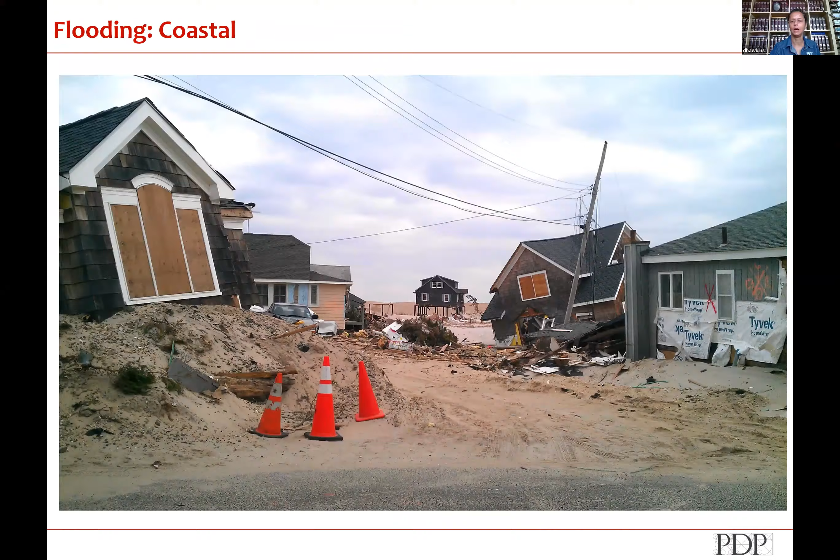Historic communities are always flooding. This is nuisance flooding, this is the roadway that causes you to go around. Doing this quickly—this is what wind and waves look like, and this is the aftermath of wind, waves, and water. Ice on a river, and we were here.

So this is the Schuylkill River in Philadelphia. I just did a flood guide for Manayunk in Philadelphia. This is what it looked like on the other side of the buildings—the water rose from the river and was percolating up on the street.

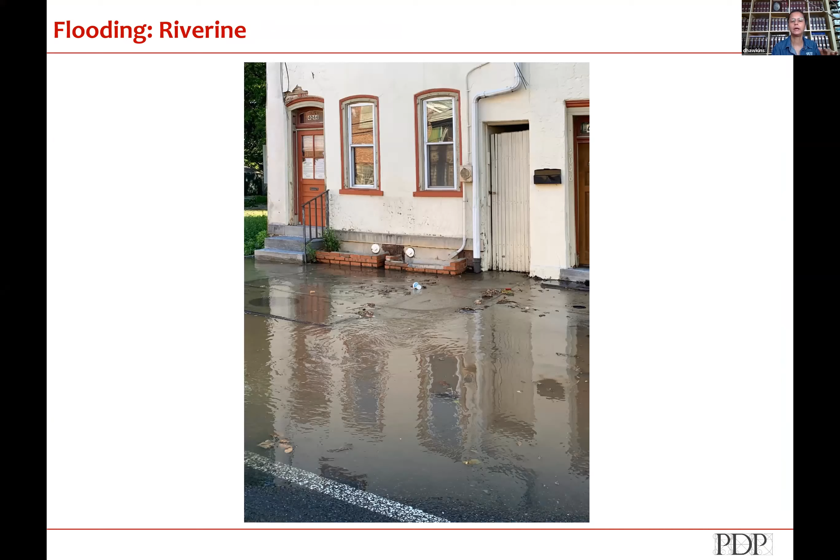You can also get flooding off of lakes. A lot of flooding is due to storms coming in and the impact of that storm—wind, water, wave combination, rain coming down. It could also, in the case of a river, be raining upstream and come down and affect a neighborhood below. All of those things can cause flood. The other thing I won't spend a lot of time on is infrastructure failure—a water main break, for example, in a neighborhood could also cause a flood.

The National Flood Insurance Program was founded in 1968. Most people are unaware that their homeowner's policy does not cover flooding—no standard homeowner's policy covers flooding. That means if you do not have flood insurance, the full risk of the flood is on you. Any repairs or losses you have are on you to repair, financially. The federal government does not magically come in and throw money at a flood.

The National Flood Insurance Program was founded in '68 because a lot of property owners had no flood insurance, and they were realizing flooding was becoming an increasing problem. Flood insurance is available to any community that meets the floodplain management regulations of the National Flood Insurance Program. I haven't checked for Delaware whether all communities meet that requirement, but most typically do. You can get flood insurance—standard policies are $250,000 for the property, including the building, and $100,000 for the contents.

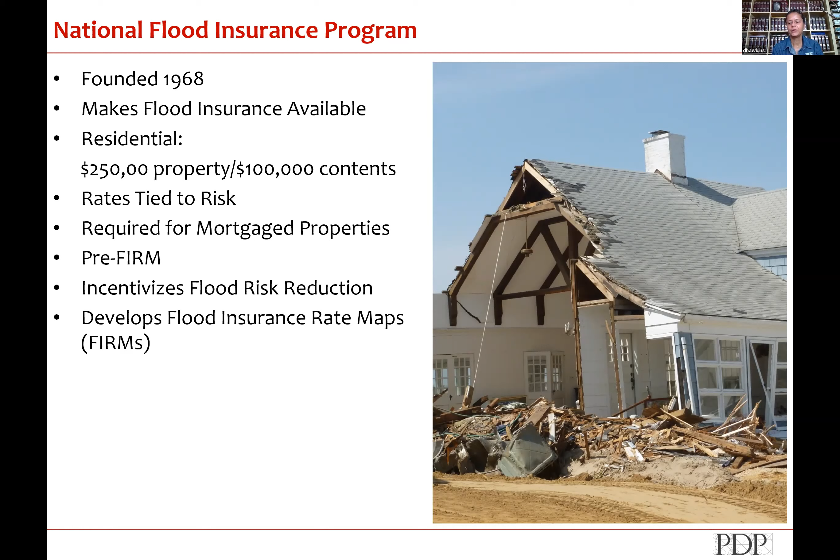One of the other things the National Flood Insurance Program does is develop these flood insurance rate maps. These things look really cryptic. It took me a long time to figure them out, but I'll give you the quick brief as to what you need to look for. This is a flood insurance rate map for Lewes, Delaware.

Everywhere shown in blue has a chance of flooding - it's the entire town. This area shown in blue is known as the Special Flood Hazard Area, which means that in any given year it has a 1% chance of flooding.

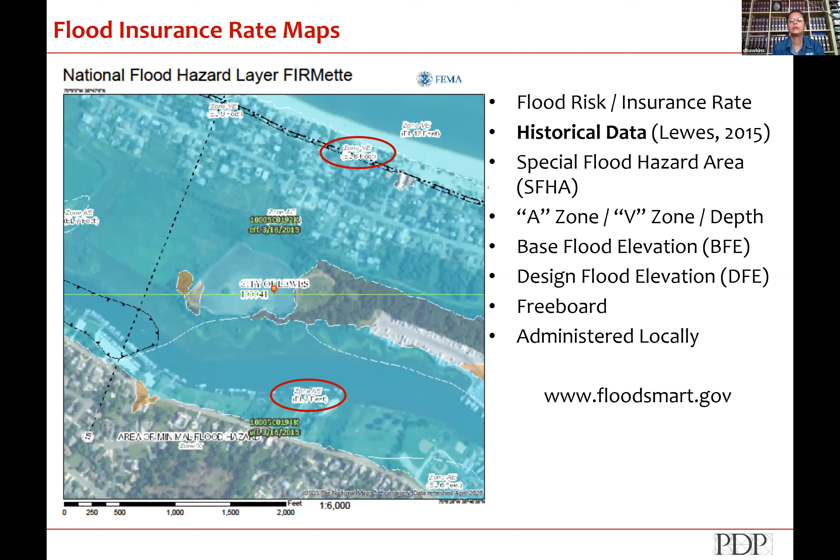If you look at the red circles, the top one is located near the beach, and there's another further inland. The top one says Zone VE. The V indicates velocity - velocity is waves, so there's special consideration if you're located in a flooding area where there are waves. The lower one says Zone AE. A means no waves, it's just rising water. Think about a bathtub rising versus sitting on a beach.

The top one also says 8 feet. What the 8 feet denotes is that it is 8 feet below the base flood elevation. Base flood elevation is the height at which, during the 1% flood, your house will not flood. So the ground near the top beach location is 8 feet below where it will not flood, where the chance of flooding is 1% or less. The bottom one says 7 feet - that one is 7 feet below where the chance of flooding is 1% or less.

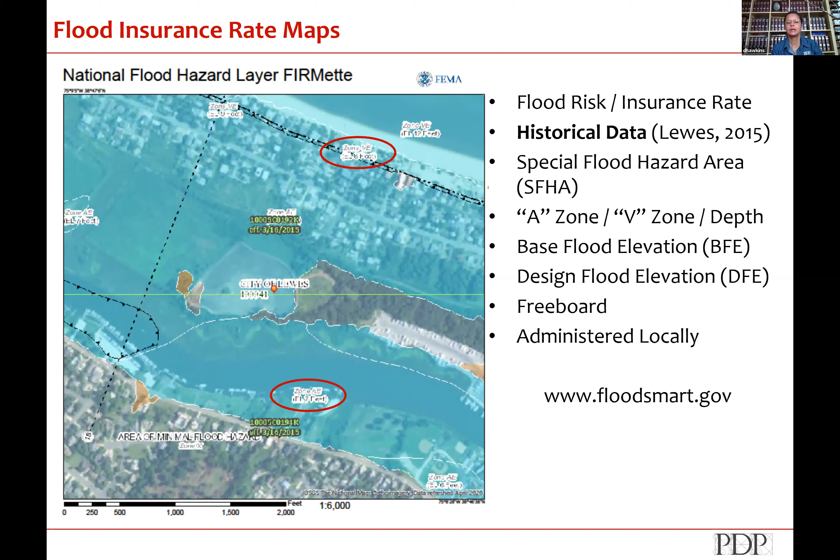That is referred to as the design flood elevation. So if you're building a house today, instead of building it at the base flood elevation, the municipality may say you have to build it 1 to 2 feet above it to meet the design flood elevation. I said specifically the municipality, because every municipality administers their own floodplain management system. No person from the state or federal government is going to tell you how to build - it's managed by the local municipality. They may be informed by the state, who is then informed by the federal government, but the federal government does not tell you how high to build your house.

One of the things that is also apparent is that all of those maps are based upon historical data associated with flooding. So it looks back over the previous years and says, okay, in this location it has flooded at these times. If it has flooded 10 times in this location in the last 100 years, and the flood levels are this high, then that's how they calculate the flood risk. It is not taking into account either sea level rise or subsidence. It's based upon historical data.

I would also like to note the flooding is not all at the coast. There's a lot of flooding in the middle. Rivers are a huge source of flooding. We coast people tend to think about the coast, but the center of the country is also vulnerable to flooding.

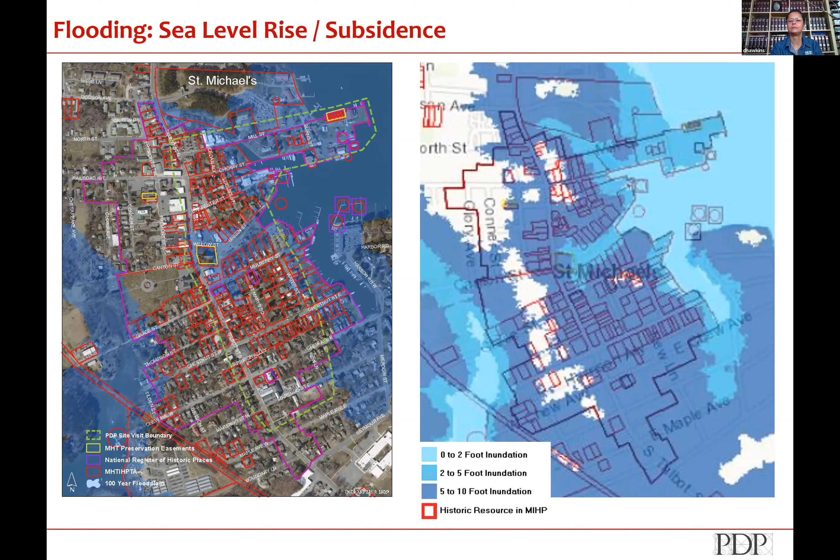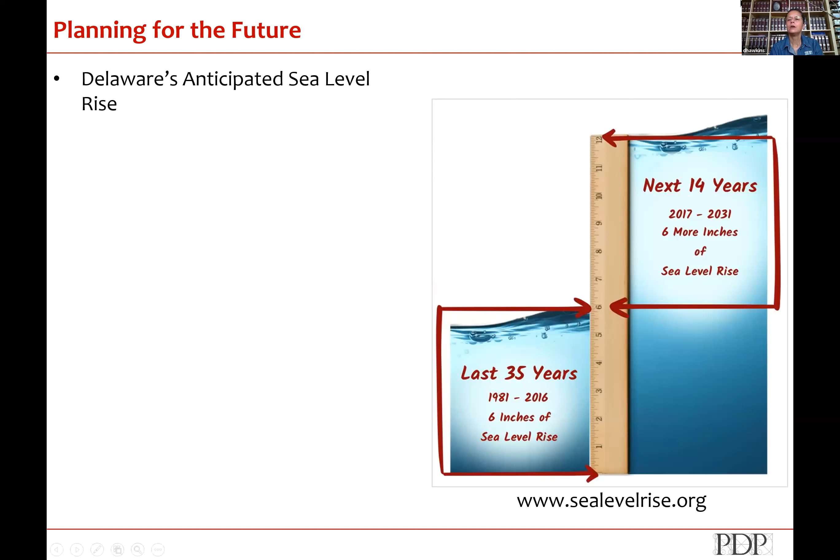This is from sealevelrise.org. From 1981 to 2016, Delaware saw 6 inches of sea level rise. From 2017 to 2031, they're anticipating another 6 inches. So the speed of this is increasing.

You can get a lot of information online about understanding the flood risk a community is facing. One thing I'll really strongly emphasize is you should know whether it's based upon historical data, such as the FIRMs, or whether it projects for sea level rise.

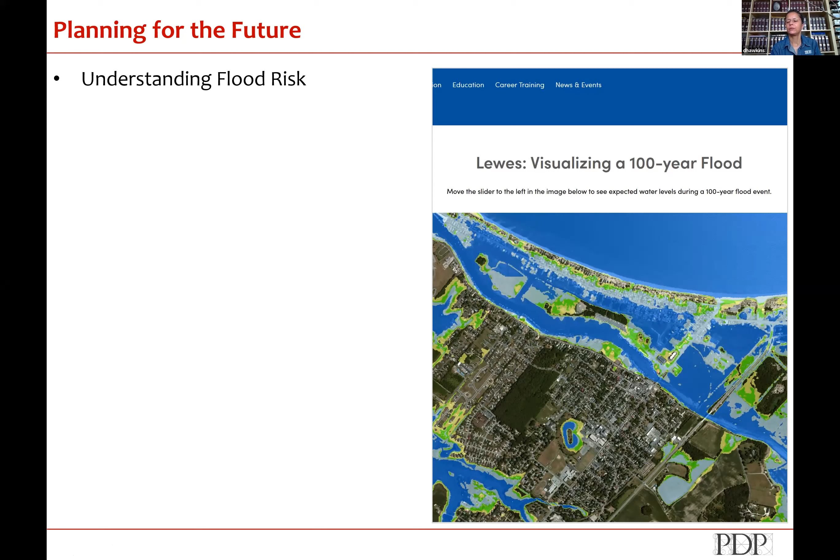So how do you assess historic flood risk in a neighborhood? All the same houses in a row - the ones at the bottom of the hill are at greater risk for flooding. That's it. So there may not be a magic answer, which is what many people look for in terms of how you regulate in a historic context, changing buildings.

Elevation is one of the key ways to address flooding for residential buildings. There are differentiations between residential and commercial, and I'm going to stick with residential for today. Elevation is the most common way to address flood mitigation.

The little wavy line there is the base flood elevation, the design flood elevation. The person at the top of the hill has no flood risk, probably in their basement, but we'll leave that out of the equation. The person at the bottom of the hill has the first floor pretty much underwater.

So what do you do? If you're going to raise the house, you get a very different kind of image about what that looks like and what that means in a historic context.

A can leave their house as is - we're assuming again the basement doesn't exist. B probably took an approach none of us would be happy with, but it's a real typical approach: I get this bonus space downstairs, and I can get a garage and some parking and maybe some storage. C, I would say, also took an acceptable approach. By the time we get to D, is the house so out of proportion that it's really not historic anymore? Or would we consider that to still be part of the context?

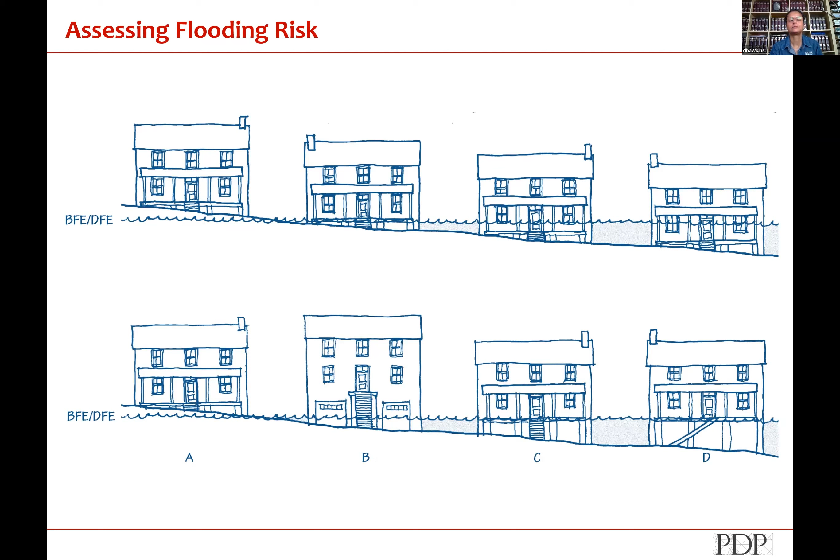So what are the options for residential property owners? Some of them are fairly straightforward. Again, if we're dealing with nuisance flooding, we may not have to do that much. As we get into more severe situations, we have to do more.

Some of the basic things to start with are landscape improvements. Then there are what I call basic improvements: building elevation and wet flood proofing. I included a couple things that are not National Flood Insurance Program compliant, just to show you what they are - dry flood proofing and perimeter barriers. There's also relocation and acquisition and demolition. I'm sure people who are true preservationists are kind of grumbly about whether demolition is really an option. And the answer is yes. It took me a while to be convinced, but we'll get there.

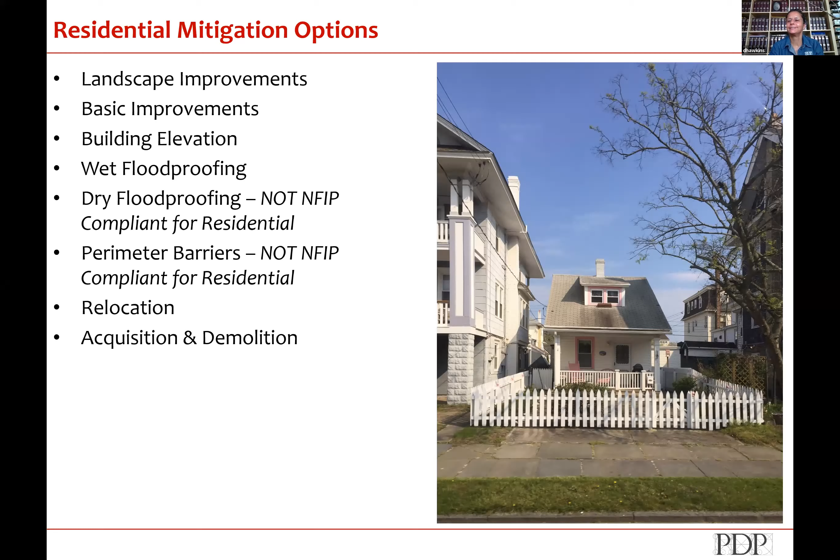So what are landscape improvements? They're generally geared towards managing water and containing it on site. Instead of allowing water to run off the road and go into a storm sewer, let's manage it on site. This goes back to what many architects on the program will know as LEED - the idea of stormwater management, keeping it on site, absorbing it back into the aquifer. Also use things like native plants, because they need less water and fewer chemicals.

These can take lots of forms. Here's a different kind of rain garden adjacent to a building, and it's actually even capturing the water coming down that downspout.

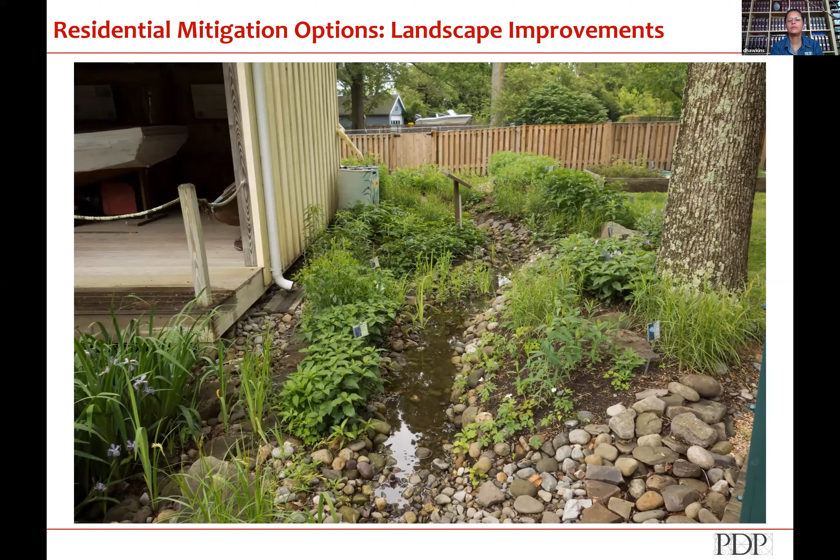Another way to capture water is in rain barrels. They don't have to be ugly, and they can go away. The idea is that you're taking the water off your roof and then using that to water your garden.

You can also use paving that allows water to be absorbed, so it's not running off and causing further problems downstream or to an adjacent property. Here are other paving options that do a similar kind of absorption.

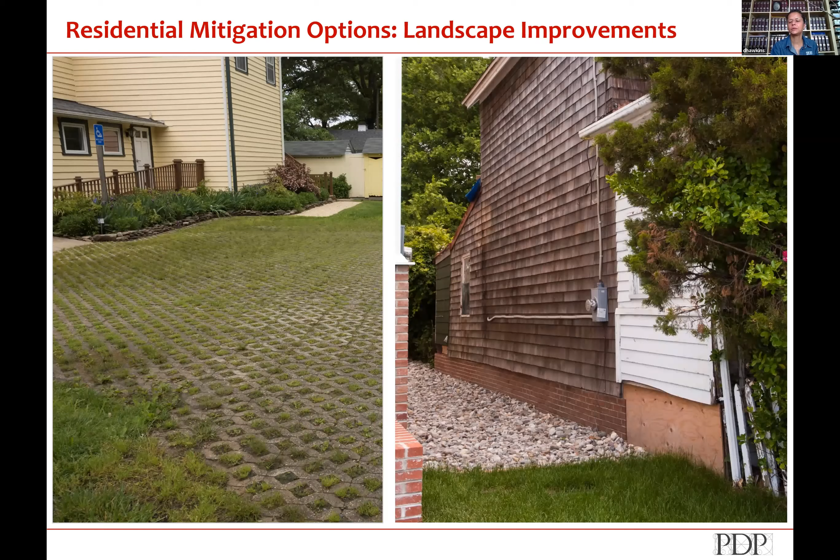One of the best ways to absorb water is to actually have a lot of native plants, not grass. Grass does not have deep enough root systems to absorb it and put it back into the soil. Native plants use less chemicals, and larger plants and trees have the ability to drive water down into the aquifers, or further down into the soil at least.

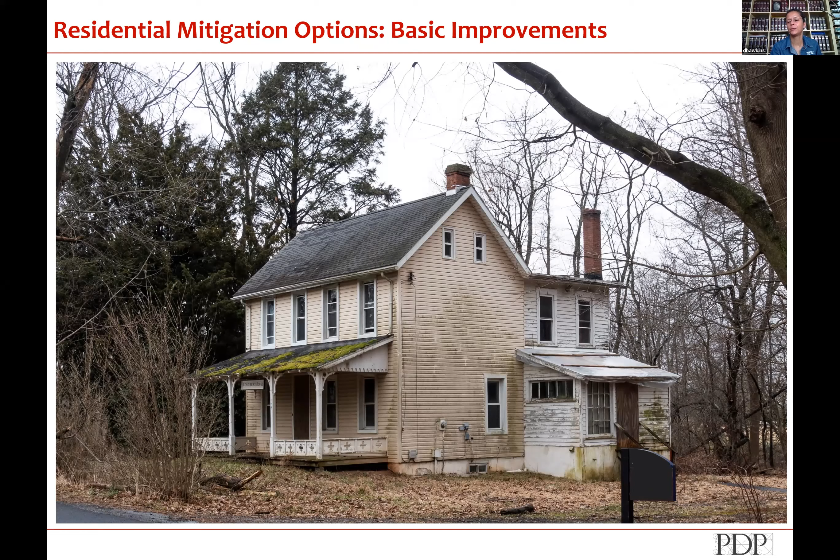We need to maintain buildings. A poorly maintained building is extraordinarily vulnerable to flooding. The porch is going to rip off, the shutters will come off in the windstorm, and all of the little cracks and crevices around the foundation will be avenues for moisture to come in. So maintaining buildings is critical. If you're really going to do a mitigation project, such as elevating a building, you cannot elevate a poorly maintained building. Structurally, it will not hold up during that process.

Other basic things: get all the stuff out of the basement, all the stuff that costs money to replace. Anything with an electrical switch or a gas switch has to come out of the basement. That means taking all heaters, washers and dryers, all appliances, electrical boxes, alarm systems, all of that stuff out of vulnerable locations. So that will mean moving furnaces upstairs, giving up basement space or residential space to house equipment that is vulnerable to flooding. The cost of replacing this after the fact will be huge. So if you have an option, move it upstairs.

If you're installing air conditioners, put them on platforms. There are lots of different ways to do this. In row houses, they also mount them to the wall, but get them off of the ground.

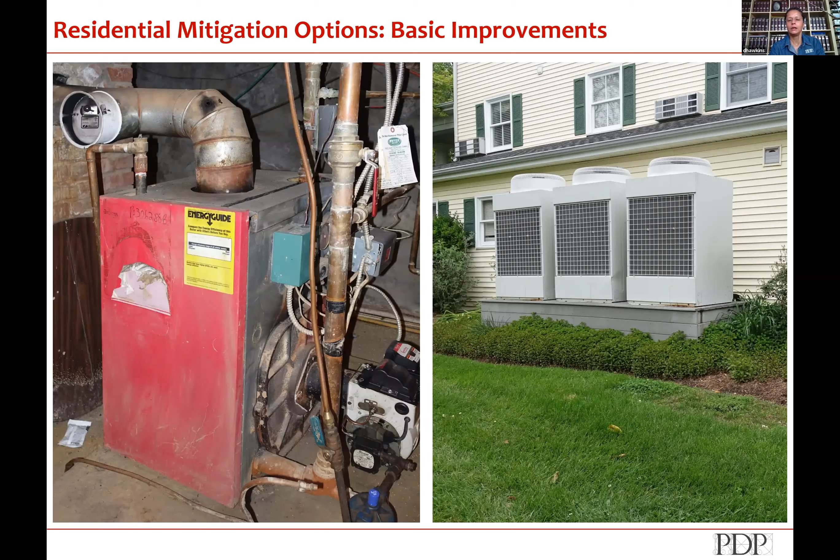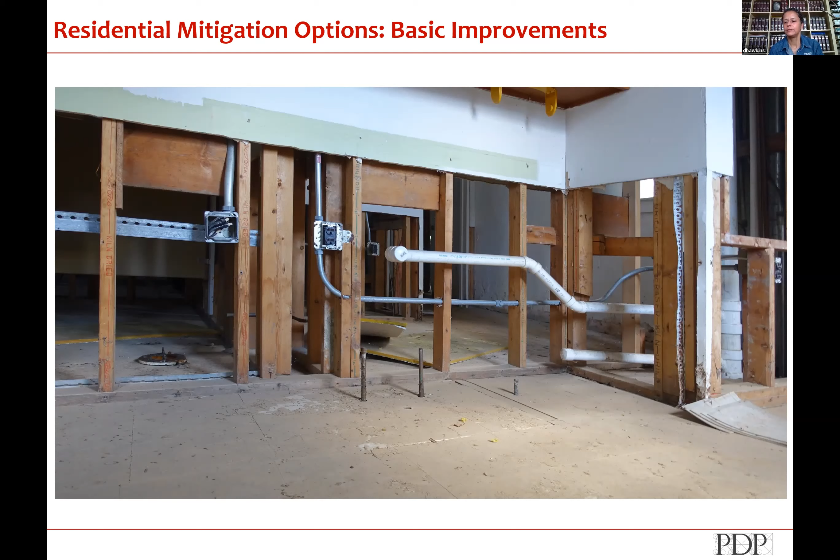Something that again makes preservationists squeamish: solar panels. After a storm, energy independence will help you recover a lot faster. We have to think about whether or not it makes sense to say, yes, solar panels don't meet our aesthetic criteria for our historic district, but solar panels will allow you to run a generator, or will allow you to run fans and equipment to repair your house immediately after a flood, whereas the larger community might actually still be without power.

On the right, in the background, tucked back there, is a generator. So if you can, you also have to figure out how to make generators work.

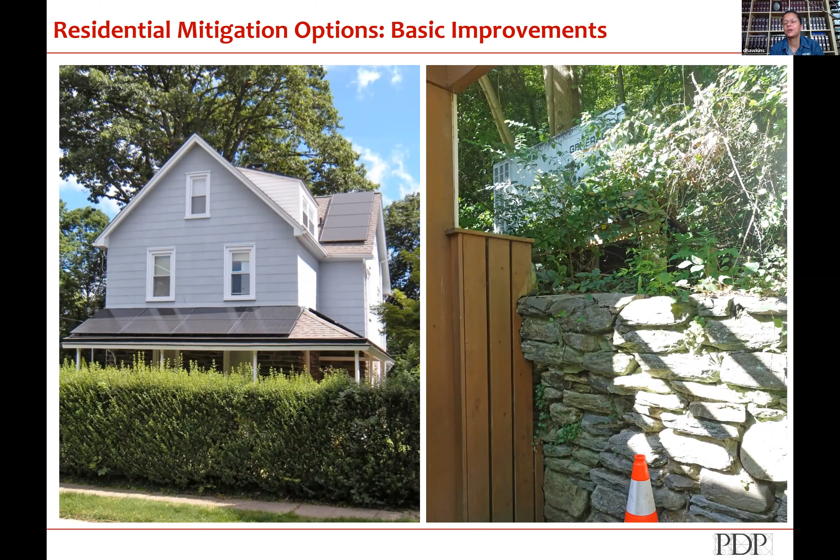So what is elevation? You can elevate any kind of building. It just gets more expensive when they are bigger and when they are heavier. So the harder buildings to elevate are going to be your stone and your brick buildings. It's hard to elevate a slab-on-grade construction. It can be done. One of the most challenging things to deal with is row houses, and I didn't include that in this, but that's also another kind of elevation.

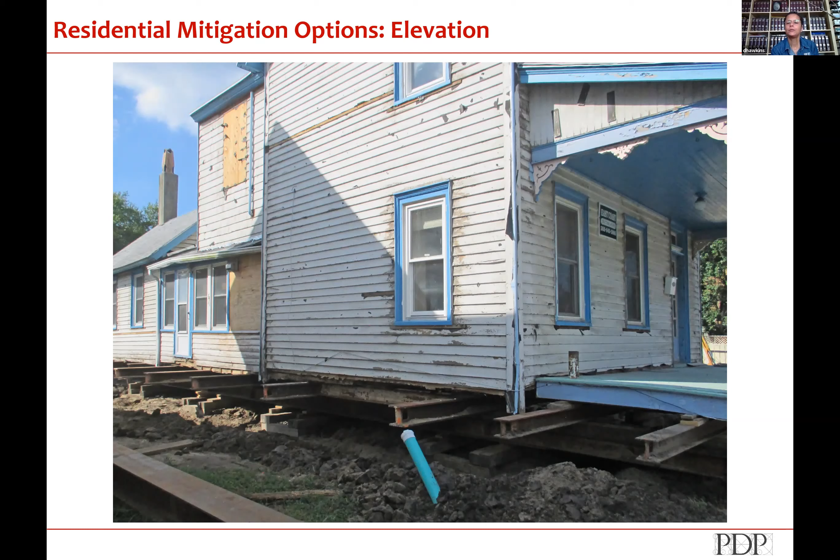There's non-structural elevation, I have one example of that. When you elevate a building, most people elevate frame buildings, but you have to get it off of its structure. You can see all the beams going through to pick it up, lift it up on cribbing - you have to disconnect all the connections, so all the piping, etc., and get it up on cribbing.

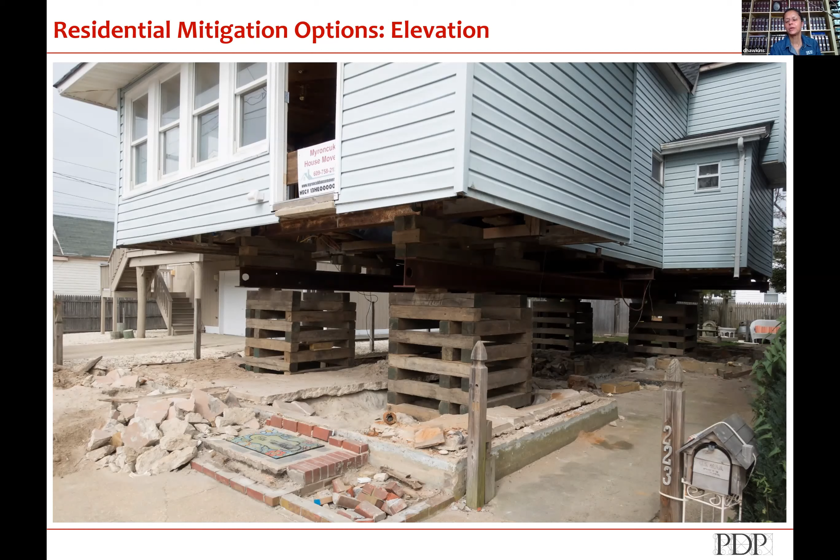Once you get it up in the air, you have spent most of the money. So if I could elevate this another 6 or so feet and get a garage, wouldn't that be great? That's the logic a lot of people take. So what we have to do is think, as preservationists, how can we balance that?

We have to think about what we can do to mitigate the mitigation so it doesn't become an albatross in the neighborhood. This is an example of, if I could elevate it, why not elevate it more? That house is probably a lot safer being that high, and I'm sure the garage space will be greatly appreciated, but does it still maintain the historic integrity you were hoping it would maintain?

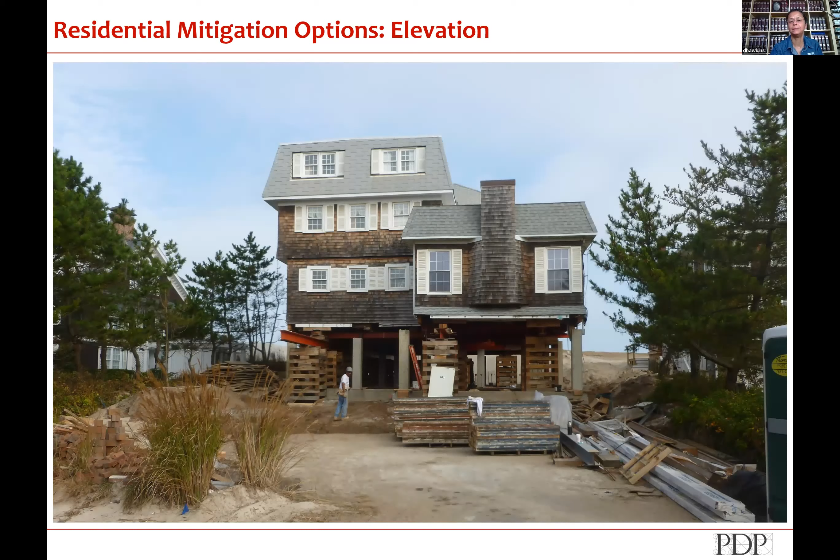So here are the options for how you elevate a building. One is you can put it up on fill and have the lowest floor above the design flood elevation. These are all for zone A, the bathtub situation where the water's just rising. So this doesn't necessarily work for waves.

You can also create a perimeter wall, elevate it onto that perimeter wall or raised foundation, and then have flood openings so water can go in and out. What that does is mitigate the lateral forces going through, so you don't cave in your walls. The flood openings allow the water to pass through.

If the building originally had a basement, and you've already taken out the equipment, heating systems, air conditioners and moved them up, you can also fill in your basement, leave it there, and put it up on a raised foundation. You can also do piers and piles.

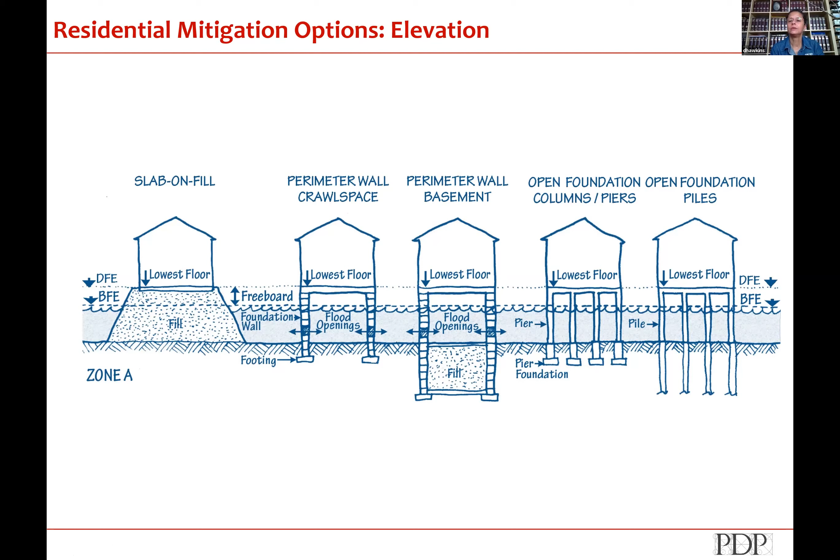This is an example where you have it on a raised foundation. The foundation along here has been constructed of concrete block. Concrete block and poured concrete are the acceptable materials to meet National Flood Insurance Program Standards for raised elevations. You can dress up the pig, because concrete blocks and concrete aren't necessarily beautiful, but you need the structural reinforcing to make it work.

The holes along the edge are for flood vents—not the top holes, which is where they lifted the house onto the foundation, but the smaller ones right below it. Around the perimeter of that foundation, they have flood vents, which let the water go in and out. This house does not have a basement.

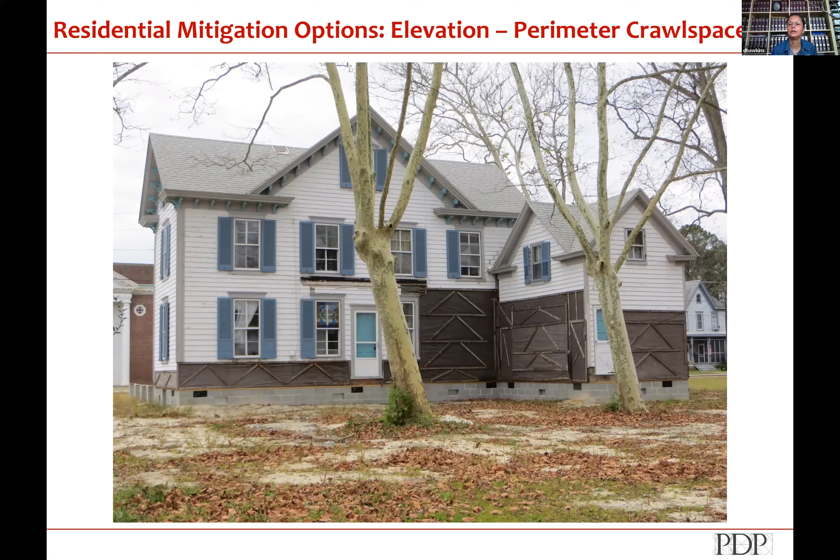That's what flood vents look like, the lower ones. The water goes in and out, and the water levels at the interior and exterior stay the same. So the flood water can come into the basement or crawl space, get wet, and then it will go away.

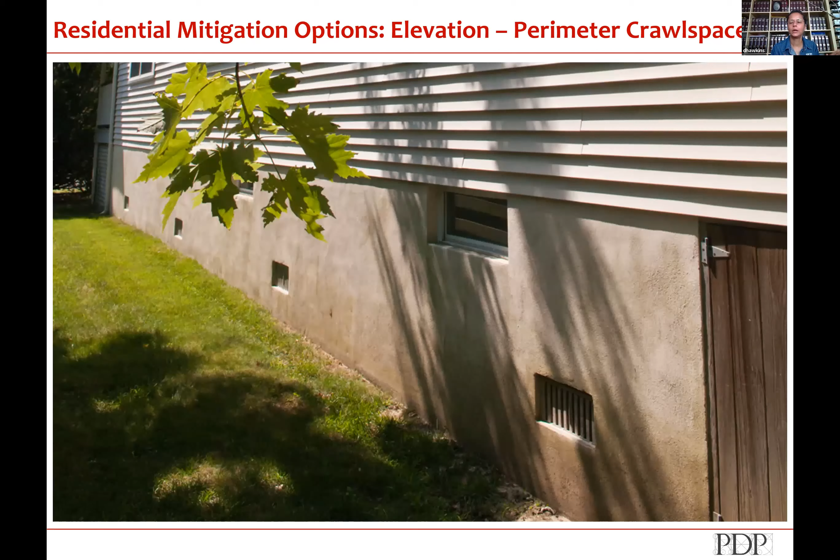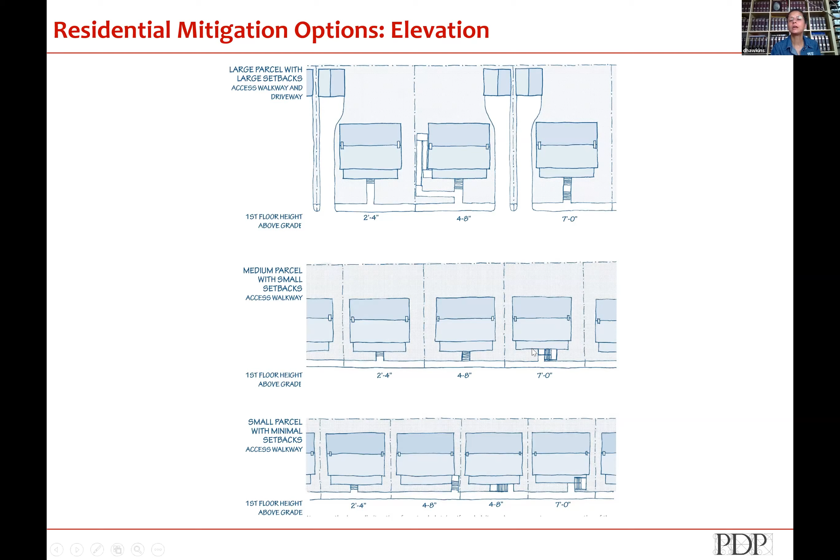In considering options, one thing to think about is the size of your parcel. The larger the parcel, the easier it is to deal with things like stairs and access. Looking at these stairs, there's a consistency with elevation heights of 2'4", 4'8", and 7'0". But the stairs start to get really tight as you go higher and higher.

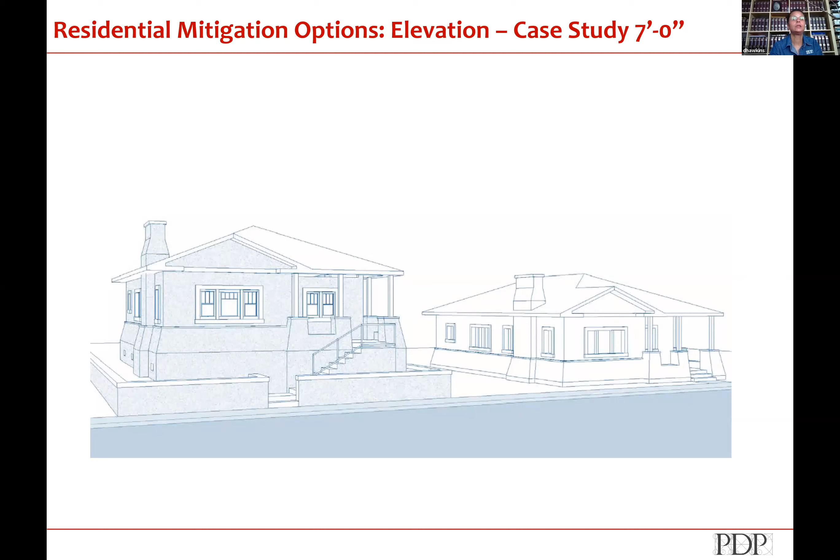So you can mitigate what that change in height is, but you do have to make compromises. The orientation of the stair has changed. We added that perimeter wall to give it sort of a base. It's pretty tight to the street. So we're looking at how can we make it still look like it fits in this neighborhood, even though it is now hovering in many ways above its neighbor.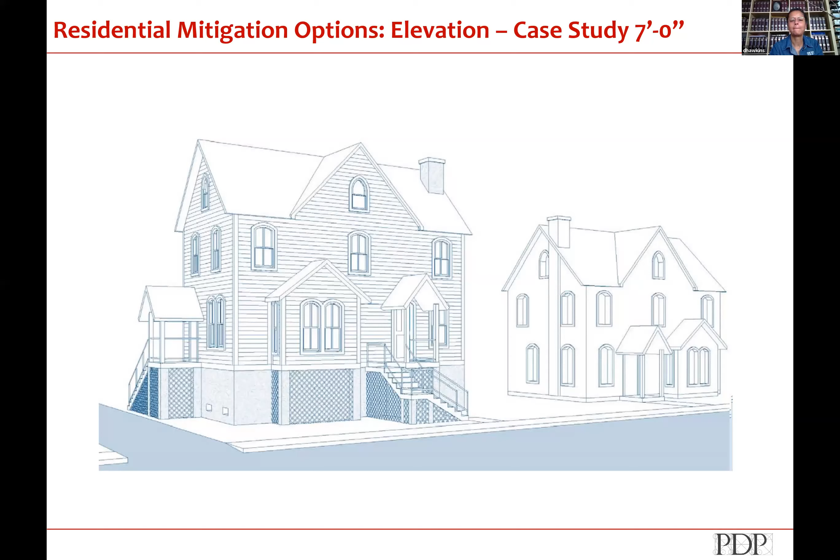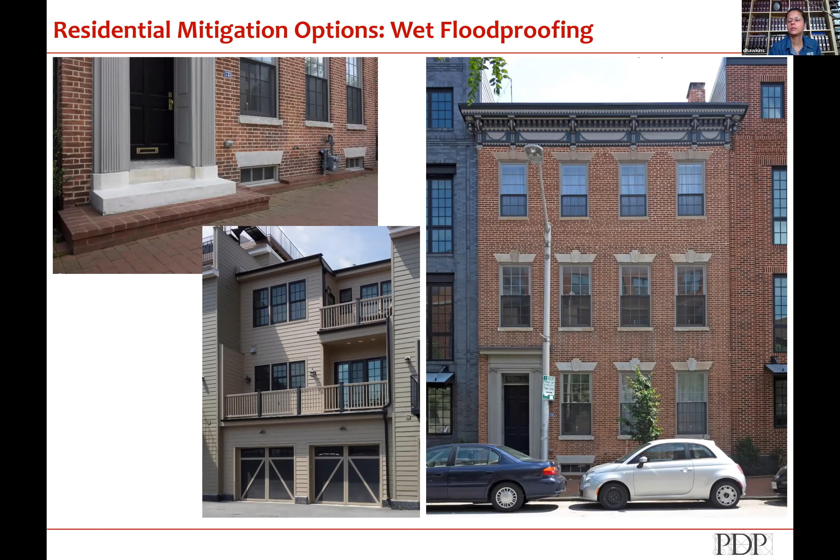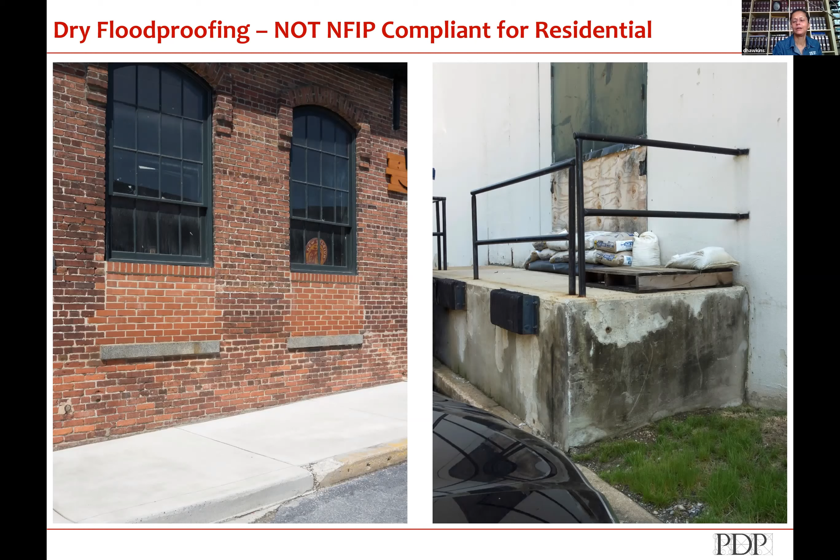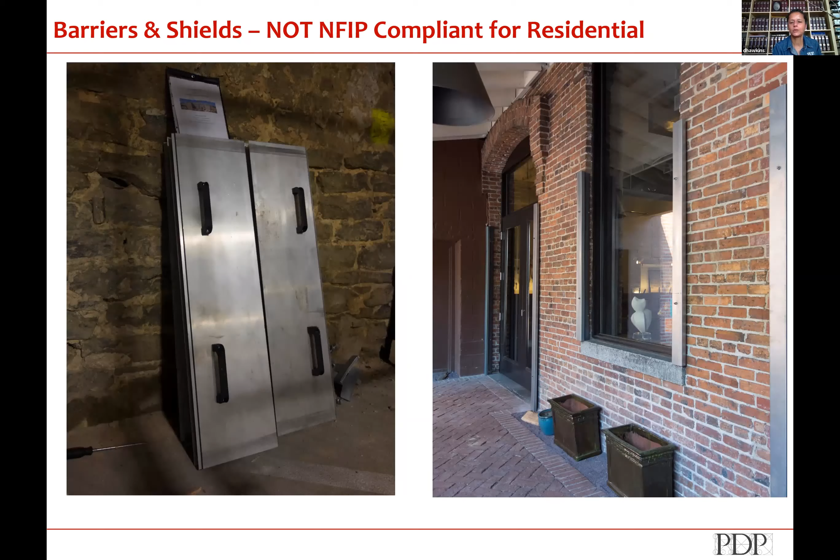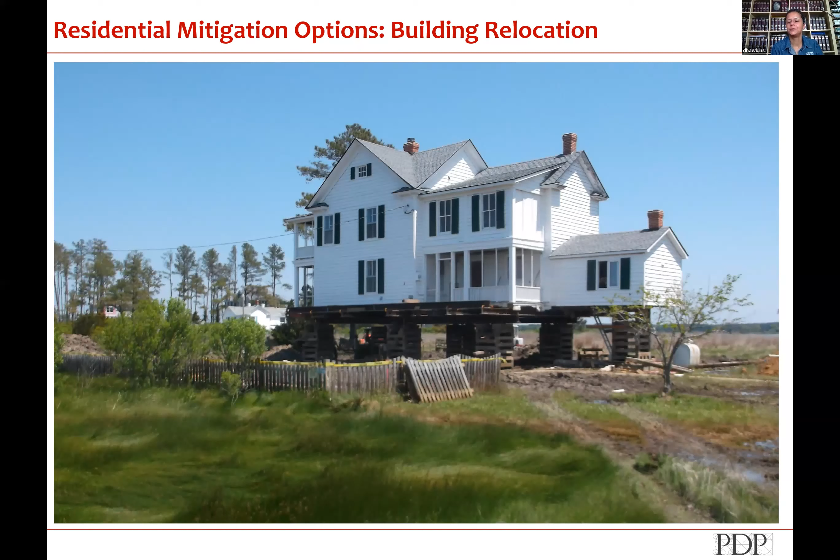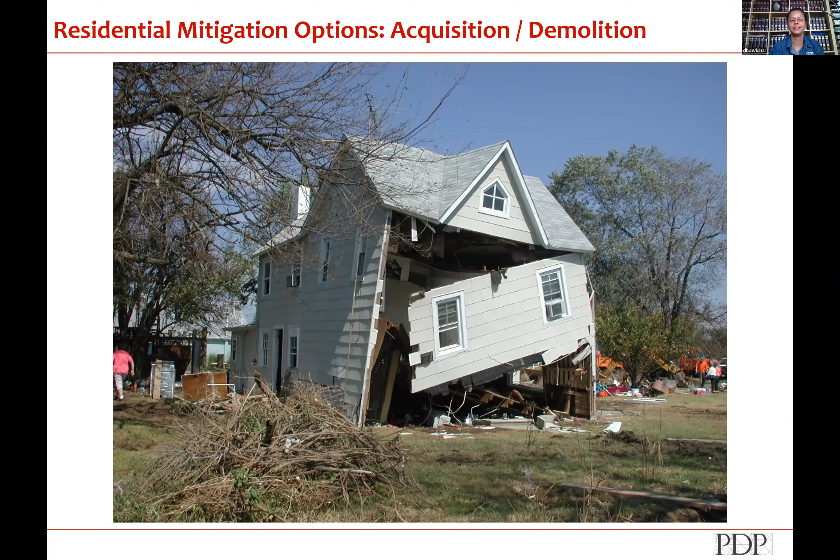And then at some point you may have to say goodbye. The reality is we can't necessarily live in places where it floods a lot forever. But we have to think about what and how we live. So if I lived next door to this person, my house was on 10-foot stilts and I was able to live through the storm, but all my neighbors around me are no longer there, is that really where I want to be? The reality is probably not.

So no one wants to be the last house standing, no matter what the condition may be. And I think I am very close to the end of my time, so I'm wrapping up. I'm happy to take any questions.